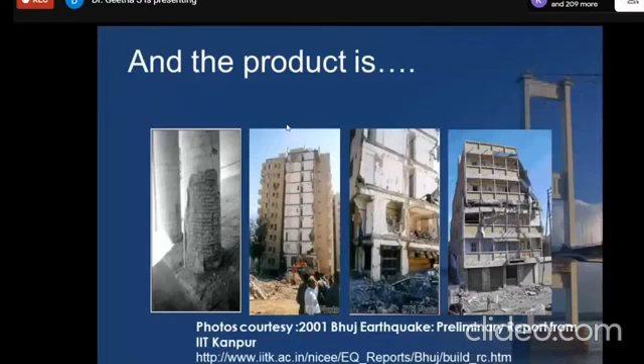customizing anything without a mix design, but an engineer's mistake stands like a monument. I think you can see this wonderful mega structure in history. But again, this is talked about only because of the mistake of an engineer. I think you know the story behind this monument, right?

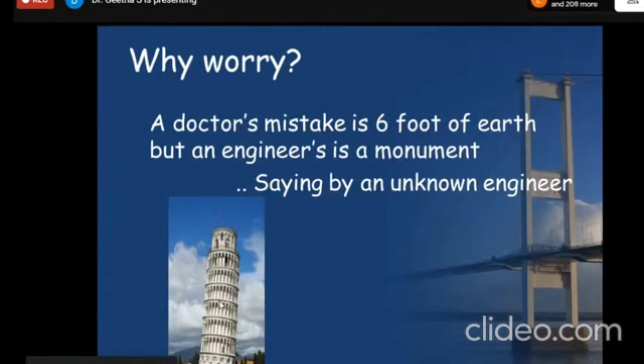Even if not, you have a lot of Google sites wherein you can see the foundation and geotechnical considerations were not taken into account, and there is a lot of story on how they started renovating, how it turned towards the opposite side and all those things. So this stands as a monument to the mistake of a civil engineer even today on earth.

Okay, next. What is the advantage of making a good concrete, or what if I don't make a good concrete? Why do I need a good concrete? We have already seen in the first slide, the ingredients are going to be the same: coarse aggregate, fine aggregate, cement, and then water, right? So with the same ingredients, how am I going to make a good concrete, and what is the deal in making a good concrete?

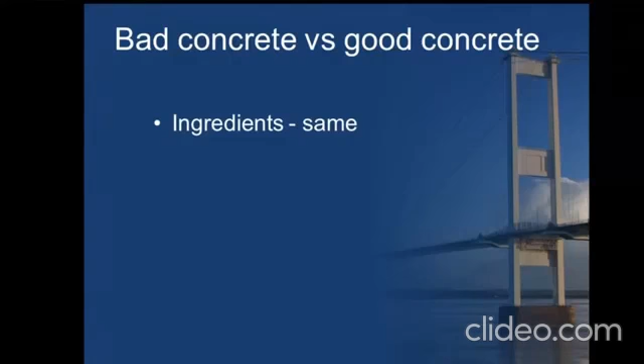Actually, whatever is used in a bad concrete, the same ingredients are used in good concrete, but with quality control, right? For example, we take large considerations in design, fabrication, handling, finishing, curing, and repairing, but we have very little consideration on the ingredients. So, as I mentioned, though the ingredients are the same, the mix design, the selection of the materials, generally nowadays we don't test the basic material properties to do the mix design. We simply go by the rule: when I say M20 concrete, the standard concrete mix will go into place.

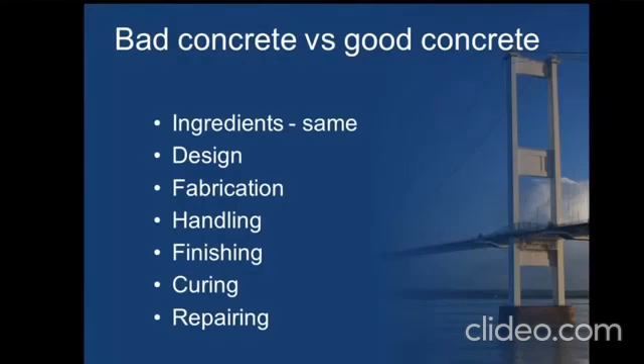Seldom does a civil engineer get a mix design from a laboratory by submitting a sample of the materials, asking them to do all the preliminary tests, making them do a mix design, and then implementing the mix design in the field. So this is the major thing. Though we have the design, fabrication, handling, and other mechanisms the same, it is the ingredients that actually differentiate a bad concrete and a good concrete.

Why do we need a special concrete? Actually, from man's civilization, starting from being a caveman, he slowly started improving his habitations, right? So he started building buildings using lime mortar, then slowly with stone masonry, and then with the invention of cement by Joseph Aspdin, it slowly started emerging.

And before going into the special concretes, I would like to emphasize one simple fact: 95% of the buildings constructed in India are termed non-engineered structures by a survey recently taken by the Indian Concrete Institute, which means that 95% of the structures have been built without any consultation with either a civil engineer or a structural engineer, right?

So it only depends upon people who claim to be civil engineers or claim to have immense practice, saying they have gained more knowledge than civil engineering, who say they have a lot of experience. But still there is some technology that goes into this material aspect, though they have experience in designing buildings using thumb rules, and they claim that it stands for more than 50 years or 20 years.

Still, you need a bit of science and technology that goes into the structure to make your structure stand strong, right? So in this aspect, as we started improving our infrastructure and our economic activities, there came into practice a lot of structures, like we started building bridges, we started building tall buildings due to the constraint in the land. Then we started improving the urban habitats and all those things.

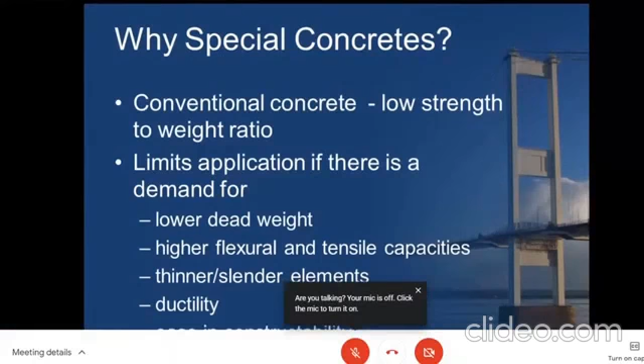When we started going for bridges and tall buildings, the main thing that came into design was our dead load. Only when our dead load is reduced can the foundation be very efficient, right? So in this case, we need to go for high strength concrete, where lots of special concretes like high strength concrete, high performance concrete, self compacting concrete, reactive powder concrete came into emergence, and these are no longer just in research. They have started to be practiced on site, right?

So the next thing is ease in constructability. Previously, as I told you, more water was required for workability. I think we know what workability is, the ease with which we can handle the concrete. Later on came the invention of superplasticizers, and not only superplasticizers, admixtures play a major role in creating these special concretes. You have n number of admixtures, from superplasticizers to set controllers, retarders, accelerators, corrosion inhibitors, and whatnot. These admixtures help a material specialist make a tailor-made concrete, customizing its properties for the intended use, right?

So when I say special concrete, the major role goes to the chemical admixtures and the mineral admixtures. So people started venturing into a lot of mineral admixtures. Of course, we know many waste materials have been incorporated as mineral admixtures, like fly ash, both class C and class F, silica fume, slag, metakaolin, and whatnot.

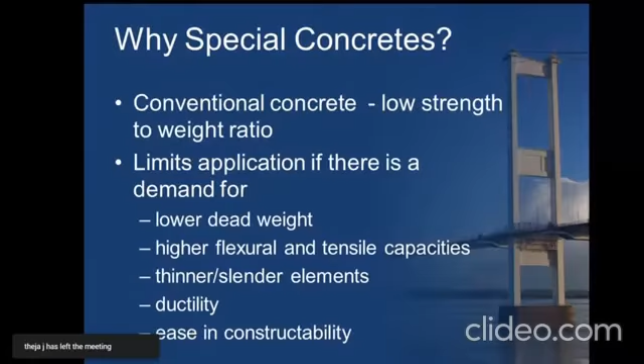Next, water cement ratio is the main aspect in making a special concrete. The main criterion is I need a low water cement ratio. So how do I avoid compromising my workability? Yes, I need good workability here also. So superplasticizers up to the third generation are now in the field. This is the forward thinking by which special concretes came into existence. So these are the reasons why we have started using special concretes.

What are special concretes? I discussed something in the previous slide. We are going to use the same basic ingredients, but not as they are. We are going to use a concept called particle packing. So I would rather use the term tailor-made concrete here; I've made it the first phrase. Though we use the same ingredients, as I told you from the beginning, mixture proportions matter a lot here. The next thing is mixing techniques. Even now, many of us do not know the concept of loading a mixing machine.

Whatever is placed near the machine, we start loading it. There is a criteria in loading the mixing machine, and there is a criteria in mixing also. Your dry mix should be homogenized in a proper fashion. Only then your mixing water should come into place. And there is a time and there is a proper way in which the mixing practices have to be carried out. And there is a time when the superplasticizers have to be added to the concrete and all those things.

And next thing is handling methods. So generally these handling methods come into practice when we have pumping facilities there. So when we have pumped concrete from RMC plants, from ready mix concrete plants, then we look into these handling methods. And otherwise, if not, we usually have a human ladder in moving the concrete to the respective place, which is again a main factor to be considered in transferring the concrete.

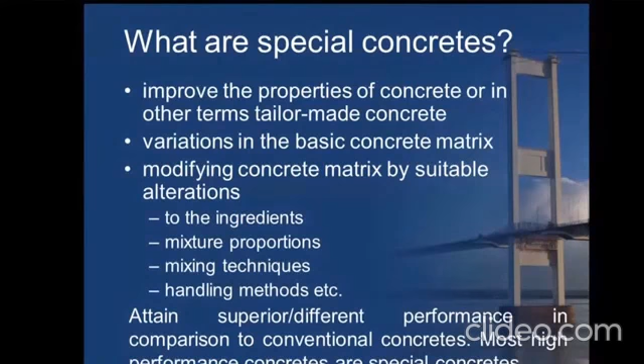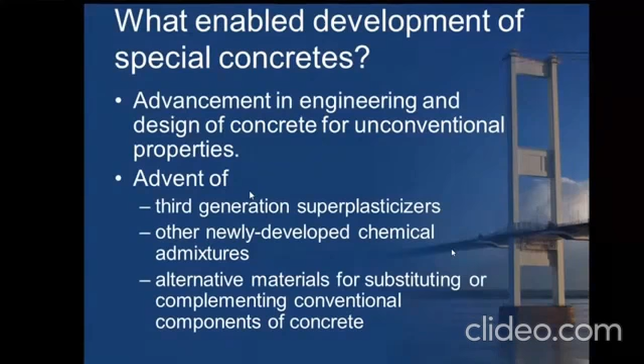structure and the type of structures the architects started designing. I think we should thank the architects for giving a big challenge to the civil engineers, because of their design we should be able to convince them, saying that our concrete also behaves equally or even sometimes superiorly than the conventional concrete that is used in practice. Even then, there is a lot of hesitation in taking this product to a commercial market.

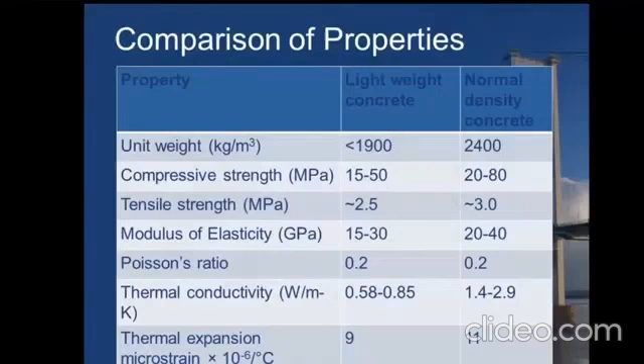And modulus of elasticity, there is not much difference here. Poisson's ratio is the same. You can see the major important aspect is the thermal conductivity, which I showed you, which I've been talking to you about in the previous case. So the isolated air void actually has a good thermal insulation. Here we can actually see the thermal conductivity value of a lightweight concrete and the normal concrete. And finally, the thermal expansion values. So these are some of the comparisons of the properties with respect to normal density concrete.

And some common applications. So in marine structures, we have gone for those infill blocks only. I would say most bridge decks in foreign countries where there are ice deposits or snow deposits, they prefer to use lightweight concrete there. And the main thing is generally floor slabs are also used. I'm not talking about the common practice in India. In India, still lightweight concrete is only restricted to building blocks that we see as Aerocon blocks.

And the technique has not been well versed, or it has not been established for us to carry out in practice. I would not say it is still in research. I would say that there is some reluctance in taking this lightweight concrete application to the market. But these are some of the applications that have been used abroad.

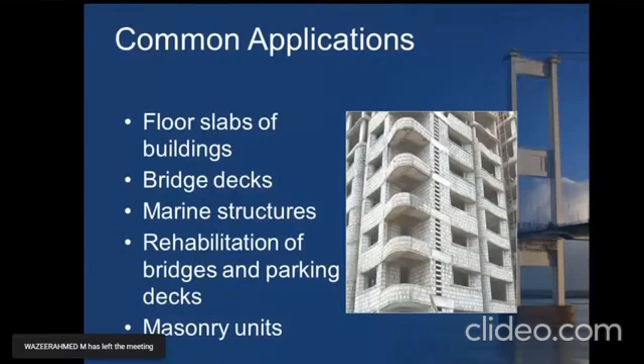Right. Next thing, self-compacting concrete, which is a very fascinating type of concrete, where we had proven that concrete can run like water. So whenever there is a problem and there is a solution, we invent a new material. So that is a very clear thing. So the same way the self-compacting concrete was invented only because there was a problem encountered in Japan.

So in Japan, when there was a big industrial level revolution, when they started constructing large constructions, the detailing showed very congested reinforcement prevailing there. So they found it very difficult to use an ordinary concrete where they required a lot of energy in vibrating the concrete to make it a honeycomb-free structure.

So it was there where a material scientist, Okamura, invented the self-compacting concrete. He's actually called the father of self-compacting concrete. Even now, the mix design that is followed in self-compacting concrete is from the paper that he had actually published. So he has given a very detailed description about this self-compacting concrete.

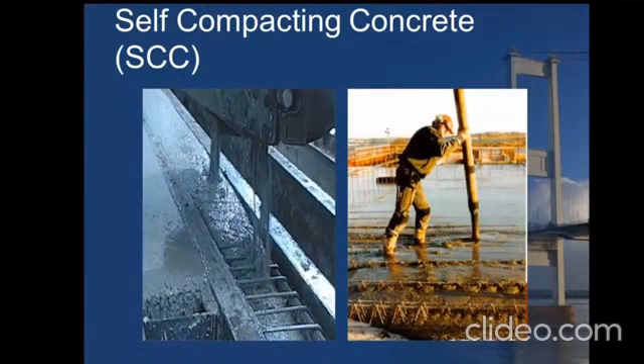And generally the main application, I would put it this way: whenever we have very congested reinforcement, we could go for self-compacting concrete, and that is the only solution for us to avoid vibration while making the concrete fill the entire space. So this is a customized concrete for congested reinforcements.

In strength, you would be able to achieve greater than 50 MPa, and you can even go up to 80 MPa. So it comes under the category of high strength and high performance concrete. And as I told you, the advantages, the density and all those things are the same.

And here you should make a note that the size of the coarse aggregate has to be limited, because, as I told you, it is mainly used in situations where you have congested reinforcement. So generally we prefer to use 12 mm down aggregates. A down size of 12 mm is preferably used in self-compacting concrete.

And here I would appreciate the use of chemical admixtures, which play a major role: VMA, viscosity modifying agents, superplasticizers, and also mineral admixtures like silica fume and fly ash. We call something paste volume here. So paste volume and aggregate volume are the two aspects which should be considered while designing self-compacting concrete.

And one more thing that is required is a very technical expert member to place this, because not all can handle self-compacting concrete. You should be able to control the speed. At one particular point, you cannot accumulate the entire concrete because it will be flowing, gushing out like water. So you need skilled workmanship to place self-compacting concrete, right? So these are some of the takeaways to be considered when self-compacting concrete is in practice.

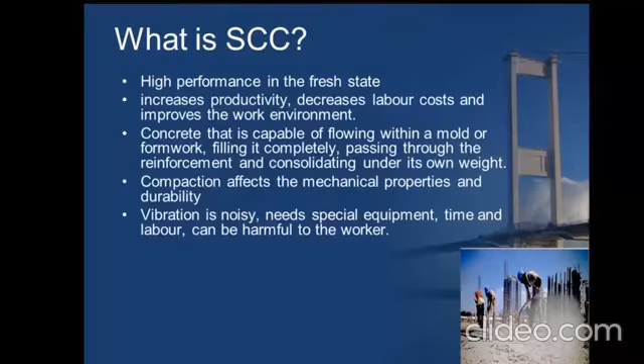So what are the features of self-compacting concrete? Mainly when we do this in a laboratory, we have a lot of tests only to check the flowability, passing ability, and filling ability. So we don't constrain the word to workability alone. We have many types of tests like the L-box test, the V-funnel test, the J-ring test, and a lot of tests are used mainly for workability.

The strength properties of SCC are very similar. You only need to cast a cube, a cylinder, and a prism to test the compressive, flexural, and split tensile strength of concrete. But in terms of workability, we have a lot of tests as per the Euro standards to ascertain whether it is able to pass through the reinforcement without any delay. We take the time traveled by the self-compacting concrete in passing through all these molds.

And the next main thing with self-compacting concrete that we have come across in practice is segregation. When we are not able to get a good blend of self-compacting concrete, there is a major problem termed segregation, where the aggregate separates from the mortar, and that is a big problem. The sole purpose of using self-compacting concrete, as I told, is that I don't need a vibrator. But when segregation occurs, it is a very tedious job to make it work in practice.

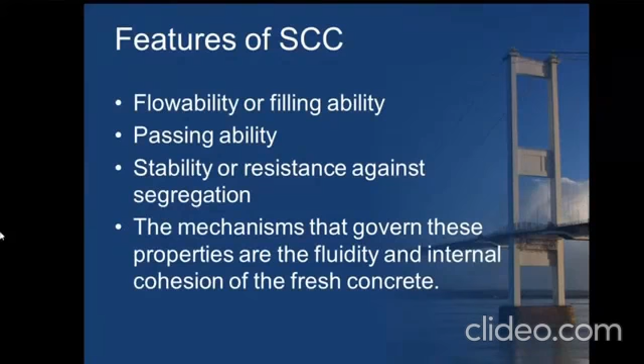So we'll see some quick tips to make a very good self-compacting concrete. Use superplasticizers, and I was talking about something called paste volume. This paste volume should be greater than 35%. I'm talking about the entire matrix. The entire volume of the concrete has to be considered; it is differentiated into a paste volume and an aggregate volume.

For this paste volume, we have a lot of tests for paste, like the Marsh cone test and mini slump test. All these are done to first tailor-make the paste combination. These are all very miniature equipment in the lab to customize your paste volume. The paste volume plays a major role in self-compacting concrete, so we need a high paste volume. This can be achieved by using mineral admixtures like silica fume and fly ash.

So if you see the customization mix proportion of self-compacting concrete, it is actually very different. The paste volume is a very major factor here, and we have a very low aggregate volume here, only 0.3 to 0.35. And next one, as I told you, we need a viscosity modifying agent, VMA, in order to look after the flowability of the concrete.

And main thing is, though we use a lot of fines, we should be able to enable the flowability of the concrete so that there is no blockage whenever we are doing those tests like passability test or fillability test or whatsoever it may be. And again, here I would like to say the water cement ratio. I think here we have given low water.

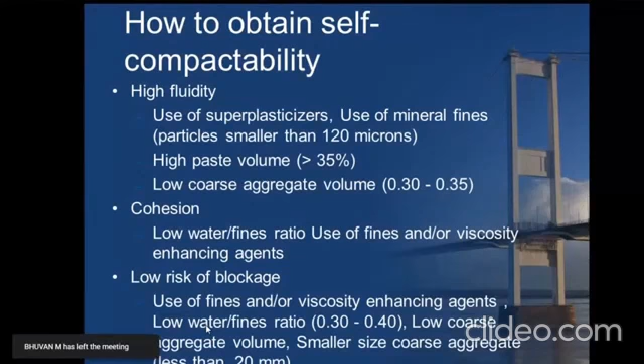So what are the applications? We have a lot of applications. Actually, now I could say self-compacting concrete has emerged as a normal concrete, and in many places people who are demanding RMC concrete are asking them to bring self-compacting concrete. I had seen a lot of self-compacting concrete in our metro rail projects also, and also some high-rise buildings use self-compacting concrete.

So these are some of the applications of SCC: bridges, tunnel linings, columns of high-rise buildings, many sandwich structures, composite structures. Self-compacting concrete is the best concrete that can be used. And nowadays for repair and rehabilitation, instead of guniting and shotcreting, they prefer to have self-compacting concrete with a chicken mesh, I should say.

And when we are going for diaphragm walls, or a mat foundation, or to construct a two-story basement below ground level, self-compacting concrete is generally preferred. And for girders and culverts also. So it has become a common concrete. In a very short time, it has found applications as a normal concrete in many buildings in India and abroad.

Abroad, normal concrete has been totally replaced by self-compacting concrete, I would say. Generally in Japan, normal concrete is very rare to see. Self-compacting concrete has totally taken over the concrete industry in many foreign countries.

So I have a video here. I don't know if you would be able to view it. You would see the pouring of the self-compacting concrete. See if you're able to view it on the screen. Are you able to see it? No, ma'am. Okay, I'll show it at the end of the session. Maybe I should share it separately, right?

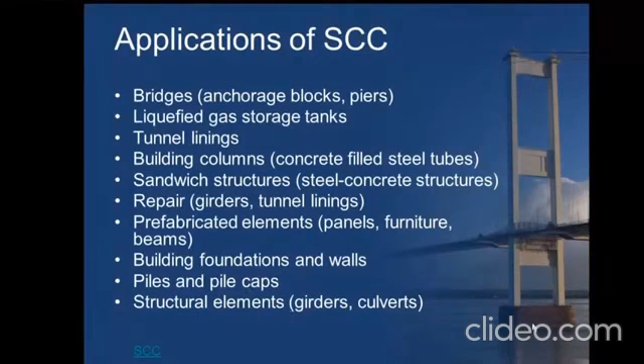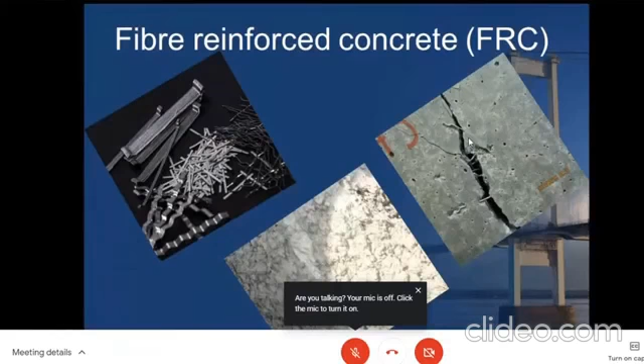So next will be fiber reinforced concrete. The major advantage of fiber reinforced concrete is it actually bridges the crack. You could see the images. The first image gives the various types of fibers that are used. This is the fiber incorporated in the fresh concrete state, where you can see the distribution of the fibers. And this is hardened concrete after the strength test, where you can see the fibers bridging the gaps of the concrete.

I've given some of the properties of fiber reinforced concrete here. Nowadays pavement slabs have been constructed using fiber reinforced concrete in many places. There are a lot of fibers, starting from steel fibers itself. You have hooked fibers, straight fibers, chopped fibers, carbon fibers, Kevlar fibers, glass fibers, polypropylene fibers, polyethylene fibers, and whatnot. Many fibers are now used in practice.

Generally, we also have a mix of fibers, which we call a hybrid fiber reinforced composite, wherein we have a combination of steel fiber and also polypropylene or polyethylene fibers. The main thing to see in fiber concrete is that it actually improves the flexural resistance of concrete. So when you want to increase the ductility of high strength concrete, fiber should be incorporated in order to overcome that disadvantage.

As I told you, after diagnosing the advantages and disadvantages, the material scientist should be able to appropriately rectify the disadvantage by using the correct material. So when ductility is a major problem in high strength concrete, it can be converted into a fiber reinforced high strength concrete, where steel fibers can be added in the matrix and the ductility of the structure can be improved.

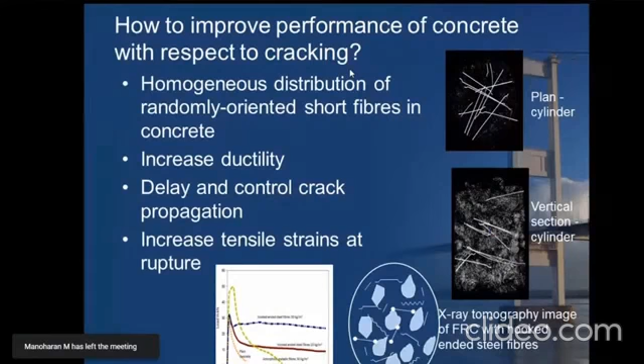These are some of the properties with respect to fiber reinforced concrete. I've given you test results and tomography image analysis that can be used to find out the dispersion of fibers in hardened concrete. In a fresh concrete state, we may see where the fibers are dispersed, but after mixing, placing, or vibrating the concrete, we won't get an idea of how the fibers are actually dispersed. This is one of the non-destructive testing methods - we generally use X-ray tomography to get an image analysis where we can locate the fiber dispersion in the matrix.

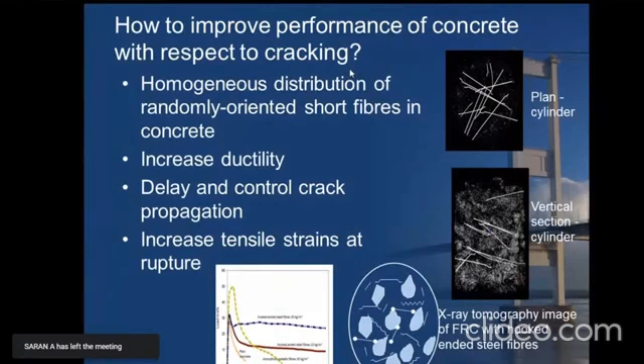These are some images to enhance the properties of fiber reinforced concrete, and as I told you, these are some of the fibers I had listed out. One thing to add here is nowadays we have started even using organic fibers from plants. Many fibers like hemp concrete are used to make sustainable concrete. Why do we need to go for steel fiber, why do we need to put polyethylene fibers into concrete? These plant fibers perform equally well, like steel fibers or polyethylene fibers.

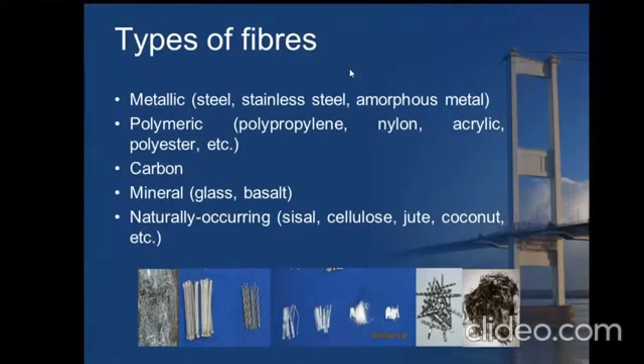Apart from these types of fibers, we also have, as I've given at the end, naturally occurring fibers like cellulose, coconut fibers, jute fibers, and hemp fibers which are also used in concrete nowadays. I don't know whether they have been used in practice - I think they are still in the research stage only. But steel fiber reinforced concrete with steel fibers and polyethylene fiber - mainly polyethylene fibers - are used in slabs, bridge deck slabs, in order to prevent shrinkage cracks. That is one major important aspect where shrinkage cracks are prevalent in slabs, and these polyethylene fibers can prevent shrinkage cracks to a large extent. Each fiber has its own unique properties which can be used appropriately wherever required.

Characteristics of fiber reinforced concrete: generally it improves the flexural toughness of the material, and it has been very successfully used in bridges, and nowadays many concrete road pavements have started using this fiber reinforced concrete, with basalt fibers. They have started using these basalt fibers because when we use steel fibers, as the concrete erodes, the steel fibers pop out, damaging the tires.

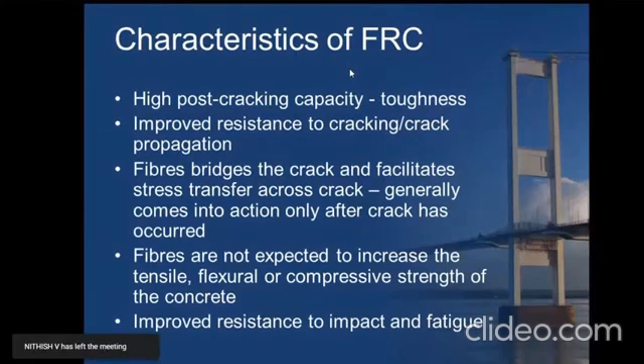So they have started using basalt fibers. One major advantage of these fiber reinforced concretes is that they take up impact load to a large extent, and the fatigue performance is also good. Fatigue is repeated loading - not like cyclic loading where you add and remove load at proper intervals, load and unload. Fatigue is continuous loading of the member. In that case, fiber reinforced concrete performs well in all cases.

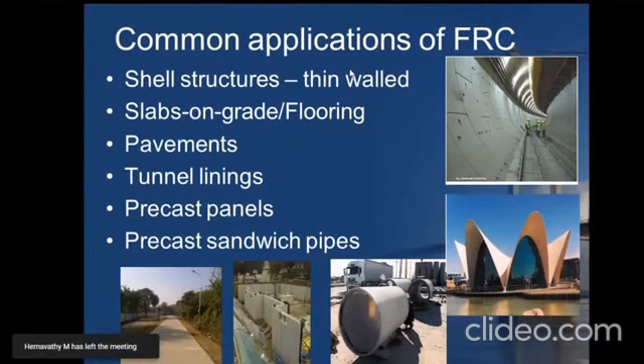So these are some of the common applications of fiber reinforced concrete: slabs on grade, which is generally what we call flooring and pavements, and precast panels - many precast industries have now switched to fiber reinforced concrete. Sandwich pipes also have larger applications in fiber reinforced concrete.

So the next type of special concrete - I think we now know this concrete a lot more. Everywhere you go for a student project, out of 10 projects, 5 will be on geopolymer concrete. This is a zero cement concrete, but the sad thing is we still haven't put it into practice because we claim it is costly - the alkaline activators, sodium hydroxide and sodium silicate. Many activators have come into practice now, but we claim this is a sustainable construction material with no carbon dioxide release into the atmosphere. It makes a green environment and all those things.

So I would like to give a briefing about this geopolymer concrete. As we know, it is a zero cement concrete. We require a silica rich base - I will not say only fly ash is used. We also use metakaolin, kaolinite, slag, and all these have been proven to be very efficient raw materials in making geopolymer concrete, not only fly ash. So I can no longer call it fly ash geopolymer concrete. There are a lot of silicate rich materials that can be used as raw materials, and you can achieve enormous strength in geopolymer concrete.

The major factor governing the strength is the molarity of sodium hydroxide and the sodium silicate to sodium hydroxide ratio. This is still in research with a lot of durability practice, but many countries have adopted it, mainly Australia, where bridge tunnelings and bridge structures have been constructed using geopolymer concrete. They have perfected the activator solution there - you can simply order a bag of material containing the binding material along with fine and coarse aggregate, and the alkaline activator supplied in cans or barrels. Take it to the site, mix it, and now you don't even need temperature curing for making geopolymer concrete - you can make it at normal ambient curing temperature.

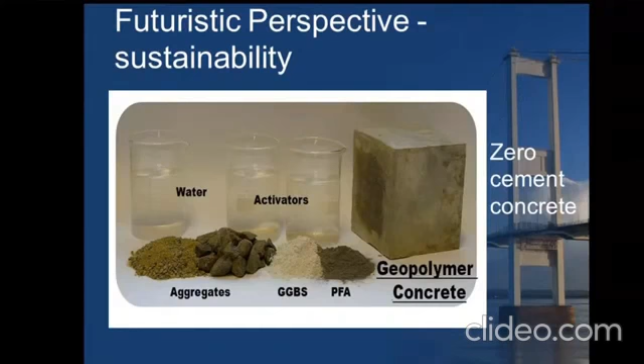Concrete in 3D printing is actually deposited in layers using a pen-like structure connected to a pump. We deposit at least 10 to 15 layers in a day. The main thing is you need to customize a mortar to avoid settlement. As I keep laying the concrete, each layer should be completely set before laying the next layer on top of it. This is one major aspect that has to be considered in 3D printing concrete.

So the main thing is mortar. Here, coarse aggregate is totally eliminated, and fine aggregate, a very fine powder, has to be used.

One thing I missed in lightweight aggregate concrete was about aerated or foam concrete. I mentioned fly ash or fine sand can be used, and the same applies to aerated concrete. You cannot use fine aggregate greater than 300 microns in aerated concrete. Either you need to pulverize the sand or use a very fine particle size distribution of fine sand in aerated concrete. That is one important aspect.

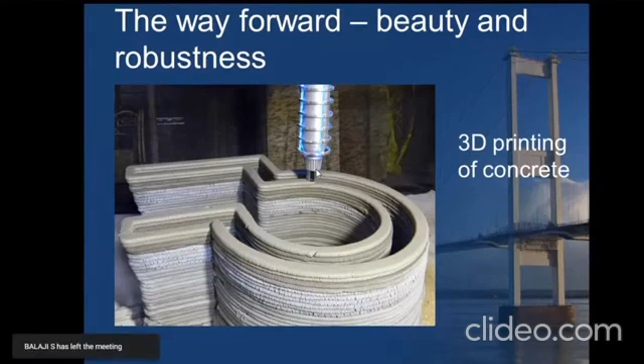You can only make a constant pattern with this 3D printing, so you need to customize the mold when you go for 3D printing. That is one major disadvantage. But if you browse YouTube now, a lot of buildings have been 3D printed. So they are customizing it slowly, and we'll soon be able to even make a building using a 3D printed concrete technique.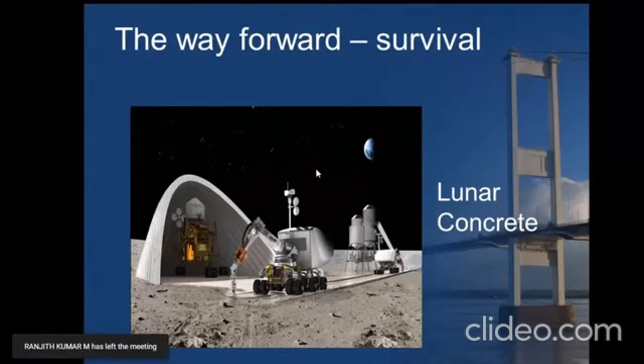So the next thing, just to have an ice breaker between these lectures, is lunar concrete. We've seen news where people have mimicked lunar concrete. People brought samples from the moon, and now there are notices that soon we'll be making shuttle spaceships where you can go like a tourist to the moon and to Mars, stay there and come back. In that case, they need to build habitats there. They brought some material from there, which was actually calcium rich material, and mimicked it, terming it lunar concrete. This is just a note on what is happening in the material aspect, not the specific material combinations that go into lunar concrete.

The next thing is also a very interesting concrete, reactive powder concrete. It has been used in cooling towers and high-rise buildings. This is notable because again, total coarse aggregate is eliminated, but the strength achieved is from 200 to 800 MPa. 800 and 600 MPa concretes are already in practice abroad. This reactive powder concrete has a lot of customization involved.

I'll give you some tips to make reactive powder concrete. One thing is a low water cement ratio, and a different type of Portland cement has to be used - a very fine kind, where the fineness needs to be very low. Large quantities of silica fume will also be used. Ordinary sand cannot be used here; instead fine quartz sand, or in certain cases steel powder, is used as the fine aggregate in reactive powder concrete.

Generally, reactive powder concrete cannot be made as a normal cured concrete. You need temperature curing to achieve this strength. Not only steam curing, but sometimes pressure is also required. So generally we go for an autoclave process where temperature and pressure enable the hydration reactions to take place faster. These are some of the major points to be noted in the manufacturing of reactive powder concrete.

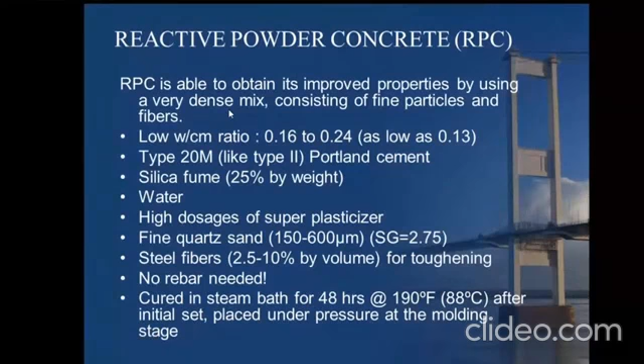I'll just show you some other results with respect to this. So, properties. We have achieved, as I told you, 200 to 800, and in India we have achieved around 100 MPa of this reactive powder concrete. Tensile strength is actually enormous, 20 to 50 MPa. And generally, wherever we are going to use this reactive powder concrete, we don't go for steel reinforcement.

Rather, we embed fibers inside the matrix of the reactive powder concrete, and the thickness of the sections that we are building using reactive powder concrete is very thin. I would give you an example. A bridge girder was designed with an M60 concrete, which resulted in 1.5 meter depth of the girder. When it was replaced with reactive powder concrete, it was only 30 centimeters. So just imagine the reduction in size of the sectional member when reactive powder concrete comes into place.

Next is flexural strength. Flexural strength is also enormous. Young's modulus is great, 50 to 75 GPa. And fracture energies: generally, it requires a lot of energy to fracture reactive powder concrete. You need very high capacity testing machines to test this reactive powder. Your ordinary compression testing machine will not create a failure for these reactive powder concrete specimens. You need to go for very high-end testing machines in order to customize the strength and finalize the mix design of this reactive powder concrete.

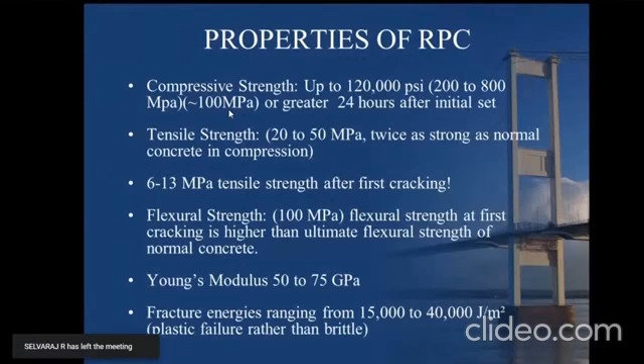And here again, you will be seeing the tests that are to be conducted, again marsh cone and mini slump, in order to bring out this reactive powder concrete. Continuing with reactive powder concrete, it is phenomenally great in durability, and it has no shrinkage or creep because coarse aggregates are not incorporated inside this concrete. So there is no shrinkage or creep.

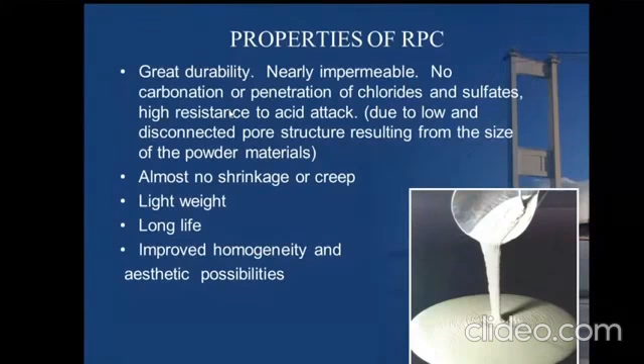And since coarse aggregates are totally eliminated, the density of the concrete is also less when compared to conventional concrete. It will be around 1900 maximum. And I can term it as lightweight. Why? Because it comes under the slab of 1900 as per ASTM. So I can claim this as a lightweight concrete also. And one more thing, I don't have a problem with segregation and all those aspects because my coarse aggregate has been totally eliminated from this type of concrete.

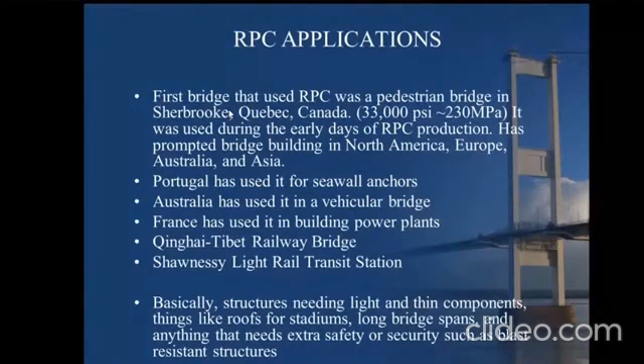And what are the applications? I've given some very interesting structures that have been built using reactive powder concrete. Mainly, structures abroad have been built with reactive powder concrete, and it has been found to be very advantageous in building long span bridge structures and stadiums also. These reactive powder concretes can play a major role when reduction in sectional properties is a concern.

Right. So the next thing is nano concrete. Nano concrete has become a very common way of treating, but it has still not come into practice. Nano concrete has been tried in shielding of radiation in some industries. We have single-walled nanotubes and multi-walled nanotubes, and apart from this, when nano materials are used in concrete, we call it nano concrete. When we pulverize mineral admixtures to nano size materials, we even term those as nano concrete. Generally, nano concrete was initially termed when carbon nanotubes were incorporated into concrete.

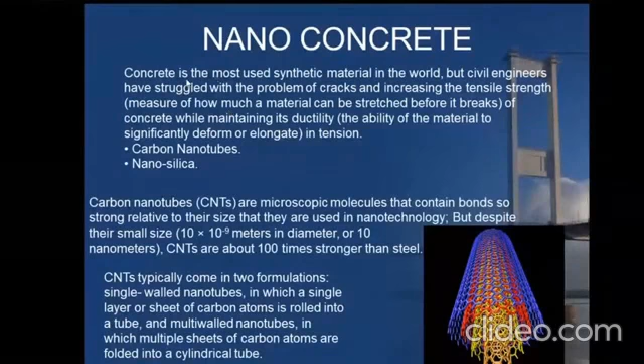The only major disadvantage in nano concrete is dispersion of these nanotubes, and now I think this can be overcome using a sonicator. You can disperse the nanotubes effectively using a sonicator, and the strength of the nano concrete is again enormous. When you require a high strength concrete with lower cross sectional dimensions, this type of nano concrete can be used.

Next is again a fantastic concrete called self-healing concrete, which is still in research. They say self-healing concrete is a bacterial concrete. Not always. Not only bacteria play a major role in self-healing. It can be made in two types. Self-healing can be done by bacteria, and also you have some epoxies. I could also reveal the name.

It is sodium silicate. Sodium silicate, otherwise called water glass, is put in capsules. These capsules are tailor-made. The sodium silicate is filled inside the capsules and dispersed across the entire matrix. So when a crack propagates, the stress on the capsule breaks it, releasing the sodium silicate outside, which bridges the crack.

So this is a very simple basic phenomenon in self-healing concrete. The major disadvantage is your capsule should be designed in such a way that it breaks correctly when the intended stress is applied. Otherwise, there is no point in making a capsule and incorporating it in the mortar, right? So that is a major point to be noted here.

And next thing, as we know, bacteria. Bacillus is the strain here, and it is a very easily available bacteria, which you can see in the mud. Sand strains have this Bacillus strain. You can just extract the bacteria. You can use an agar-agar solution. You can cultivate the bacteria, increase its number, and then incorporate it in the concrete. It becomes dormant. Actually, this type of concrete was again discovered accidentally.

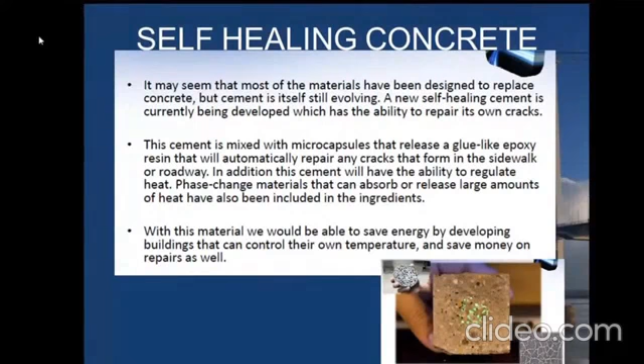we extract the bacteria, we increase its number, we incorporate it into the mortar, and when there is a crack, the conducive environment for the bacteria actually occurs. It gets water, it gets sunlight, it gets oxygen and all those things. And finally, it secretes calcite, which actually bridges the crack. So this is actually called self-healing concrete. Not only bacteria, but epoxies and sodium silicates can also be used in self-healing concrete techniques.

So the next one is an interesting concrete, translucent concrete. Even before its research, it has been incorporated in commercial things. We have optical fibers incorporated in concrete. 95% will be the concrete matrix. Coarse aggregate will not be here, only mortar will be here. And we have 5% of optical fibers. Optical fibers generally transmit light.

Translucent concrete panels have been predominantly used in the walkways of many high-rise apartments in OMR. Initially we thought it was sensors, but actually these are translucent concretes; I'll show you certain images wherein it has been used. Even at nighttime, you can see some lights glowing. Not only for pavement, it has also been used as side walls. I think one stadium has been built using this translucent concrete. So it's not a big deal. The only thing is you need to find the appropriate glass fiber optical strands, which will conduct the light. It is commercially available.

So as I told you, even before research proved it, there are many components that are commercially accepted and have started being used. So now I'll be giving you a list of such components. You wouldn't have even studied research papers on these 5 to 6 materials I'm showing now. You have seldom 1 or 2 papers. Soon after that, it has been transferred commercially, right? So one such material starts here.

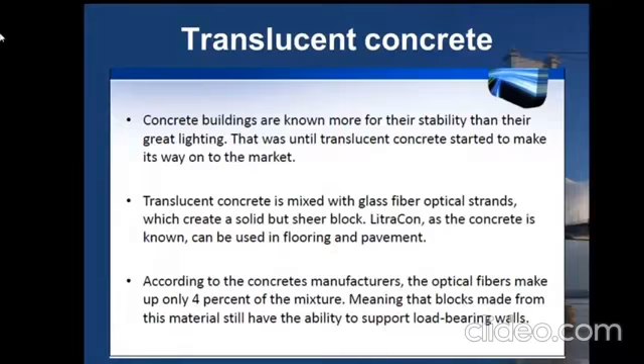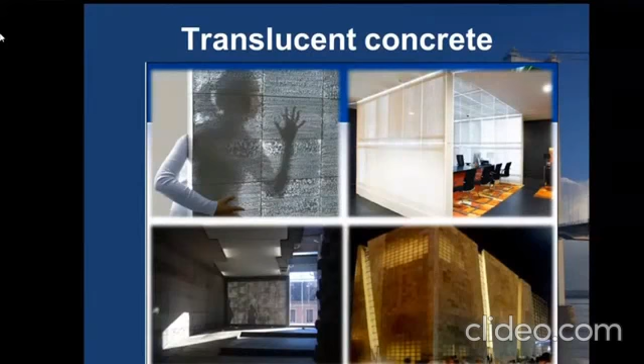It is translucent concrete. Here you can see some examples. You have the glass panels, you have some wall panels, and in many cases even your ventilators are made using this translucent concrete. Mainly daylight. You can make your building, your house very bright when you're using this translucent concrete. So this is one of the major hikes in all our special concretes.

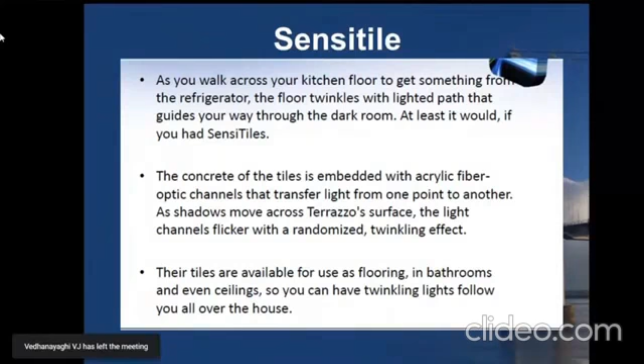Next thing is something called Sensitile. As I told you, this is the same concept of translucent concrete, which has been used in floorings, generally in many apartments, which will again improve the lighting effect in your house. I would like to show you the images here. These are some of the walkways that are used in apartments.

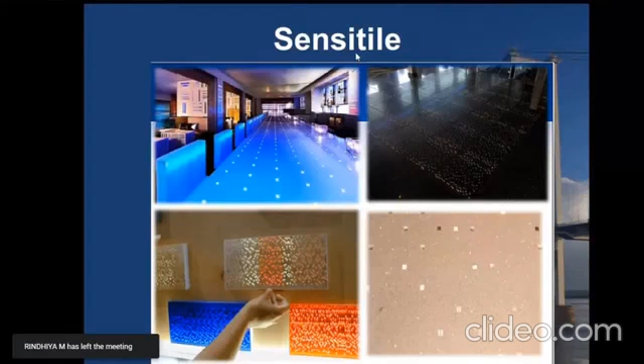Initially you will think that it is sensors, but it is not. You can see the dispersed light in all the images. You cannot have sensors so closely spaced like this. It's commercially available, and it is termed Sensitile. These are actually our concrete mortar where these optical fibers have been incorporated in order to make it attractive like this, right? So the next thing is electrified wood.

So here we need to connect it to a very minimum light. So you can use it as a table, or you can use it as a shelf, as a wardrobe or something like that. So here we have a wood and a metal piece embedded inside the wood. We actually make it by a press technique here. I think you can see the details here, but you need an electrical socket to connect.

Obviously, it doesn't have any light emitting diodes or anything like this. You need a minimum power supply where some light panels will be actually embedded here. And mainly you can use it in your study room, or it can be used in a shelf or in any particular applications. It is called electrified wood. Actually, it is incorporated wood.

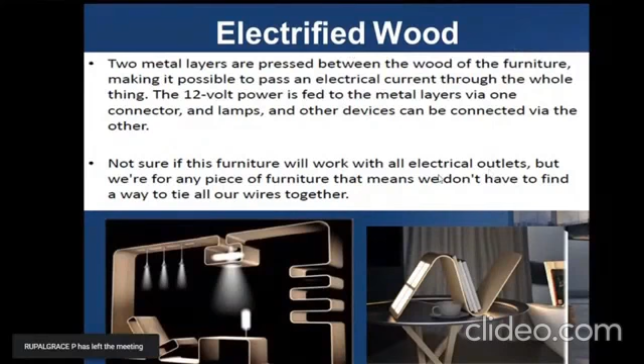So far we had seen the light emitting capacity in concrete. So this is one thing where concrete is not involved, wherein we have metal strips and wood, which can be used mainly in some applications like study table, as I told you, and some furniture which can be used in our house. And the next important, interesting thing is this Richlite.

There were only 1 or 2 papers on this Richlite. It was not termed as Richlite. This is a commercial name, and it is actually a sink top. Imagine it is just paper. This top is a paper. Actually, you can see the composition. 70% of this material is recycled paper, and you have a lot of resins that go into this. It looks similar to your granite top, stronger than that.

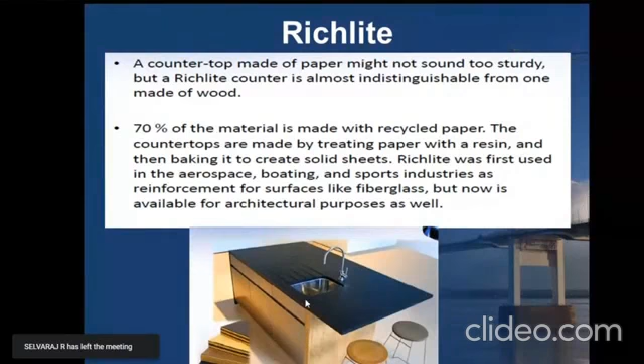Very light in weight, and this is one of the products that has been in the market recently. And you can see the combinations here. I've given here only the tabletop. I'm not talking about the wood that is in the bottom. This tabletop is actually this Richlite material made with recycled paper and the resins. Next one is liquefied granite.

So liquefied granite is like a paint actually. You can make it on a floor. When I need a 150 millimeter thick concrete in an industrial flooring, and that too gets damaged when I drop down a hammer or something like that, this material was actually found out, liquefied granite. I'll just show you the image at the next slide. We'll just look quickly into the advantages of using this liquid granite that is made like a paint.

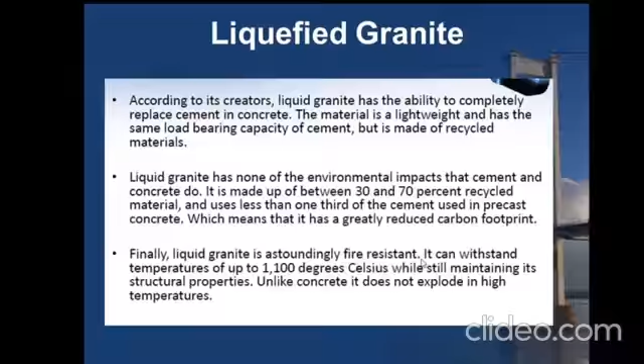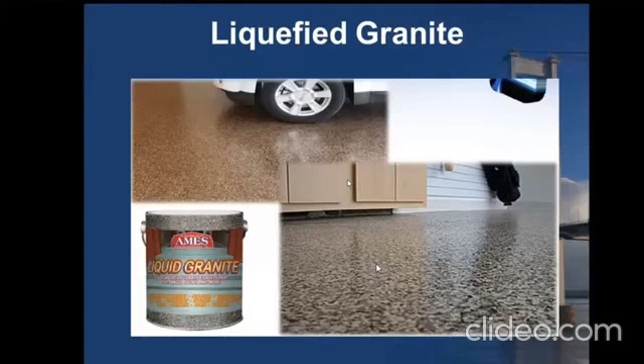We know granite. Granite is a very strong material. So this liquid granite, which can be just applied as a thin coat, will serve the entire intended purpose. Here you can see the commercial name is also given, and this is liquid granite flooring that has been done in a garage and a car showroom. So these are some of the advantages of using liquid granite, wherein I can avoid very hardcore concreting in a ground for a flooring, I should say.

Next one, bendable concrete. Again, this is still in research in India, but it has been used in many buildings elsewhere. It comes as a thin section. The main secret behind this bendable concrete is PVA, polyvinyl alcohol fibers, which make the concrete bendable. So you can bend it like a cardboard, but not by using your hand. You need some mechanism, like a compression testing machine or a flexure testing machine. It's not so flexible that you can bend it using your hands.

I'll show you. So the main thing in this bendable concrete is it is very flexible, ductile, and it can be used in earthquake resistant structures. I think now a company is coming up with precast bendable concrete which could be used in zone 5 earthquake zones, mainly in Delhi, Gujarat, and parts of the Himalayas and Jammu Kashmir. This precast construction company is pioneering bendable concrete for beams, slabs, and wall panels.

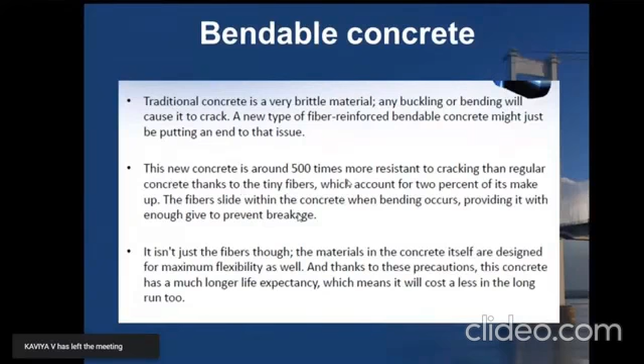And the secret ingredient, as I told you, is polyvinyl alcohol, and the dosage of fibers has to be customized depending upon the flexural resistance we need. So here you can see a bendable concrete. I said you cannot bend it by hand, obviously. So you need a loading setup like this in order to bend it.

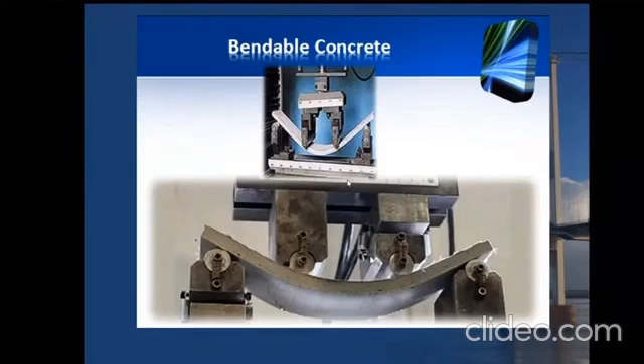So you can see the curvature of the bending in this particular type of concrete. So the next thing is concrete canvas. So here we have a very flexible material. You can see here this concrete canvas. It is actually a very light material. You have a fabric, cloth fabric or something like that, where concrete will be incorporated into this.

Main thing is it sets very fast, so you need to place it very soon. And one more thing, the strength gaining is also more. You can load the structure in 24 hours. Mainly it has been used for people making temporary accommodations, just like tents where you have some temporary arrangements. You stay there for a short time and then you just leave it. Some barren hill stations or something like that.

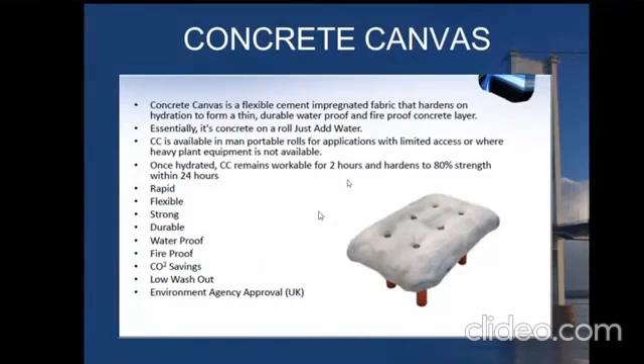So this concrete canvas will soon replace all our shamiana materials, maybe down the line. So this is one of the materials, and it has been approved by many agencies to be used. For example, when we have a larger time duration of something happening, maybe a stall or an exhibition which is happening for a month or a week's time, then this type of material is recommended for us to make the particular structure in order to place whatever things we need in that.

So next one is e-glass. I think we know this e-glass mainly. It's not like our ordinary glass that we use in car windows. So this e-glass actually traps the light when it is in winter season. It actually makes the room feel a little warmer, and in summer season it actually prevents the sun's rays from getting in. So it prevents making it more hotter.

So it has a different technique. This e-glass can be actually made on all our outer wall glazes in order to make it environmental friendly. I should say comfort. It is rather used in comfort. So Saint-Gobain has played a major role, and you may ask what is the role of a civil engineer in doing this. For your information, Saint-Gobain now hires civil engineers for their glass facades.

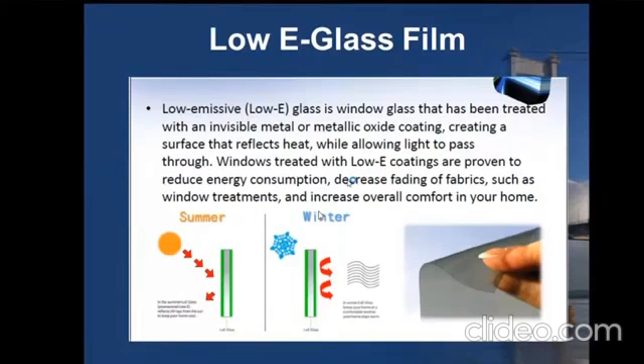So you also need to know, I think many universities have incorporated design of glass structures in their curriculum. All your IT corridors, everything will soon be replaced by these alum boards, will be replaced by these glass panels. So this is one thing which is an emerging technology using e-glass. So this is the principle behind how an e-glass actually behaves.

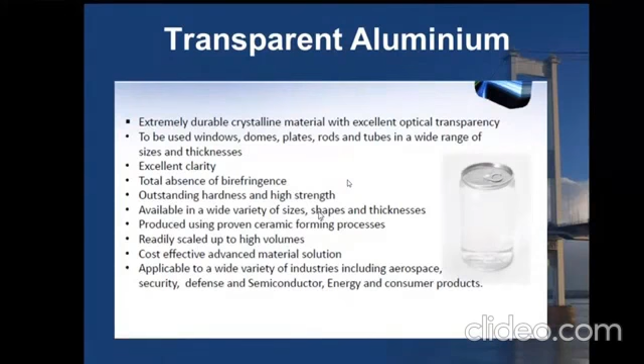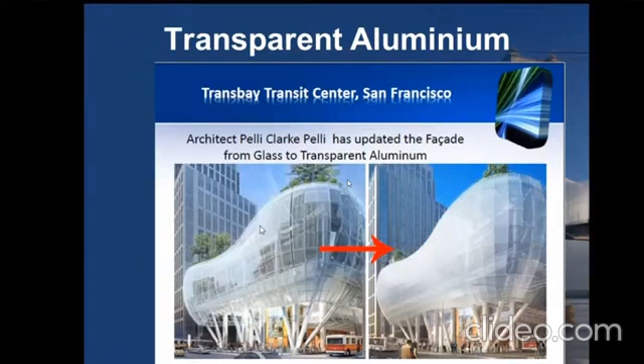So paper insulation. When we need to make a house very comfortable and sustainable, we are using some waste paper here. So again, it is a type of foam concrete wherein you can make the wall insulated. I'll also show you the layers, how they are doing it. Very cheap material, and it can be used with waste cardboards and paper, just grinding it into a paste and having a very low foaming agent in order to bond it.

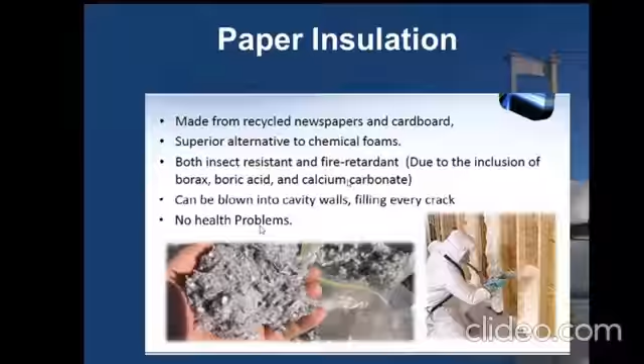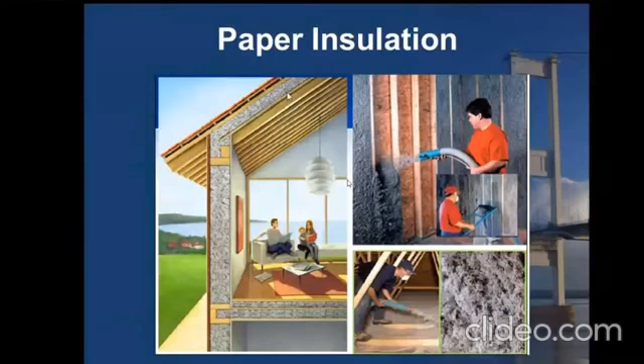I'll just show you the cross section of how this is done. Actually, the homes built of this paper insulation seem to be very cool. You don't even need an AC when you're having walls made of this material, right? So this is the cross section where you have used paper insulation. At the top you can see you have a rafter ceiling with the brick tiles here, right? So this is one of the techniques that can make a sustainable construction.

So the main advantages of using this, actually due to time constraint I removed, we have made a cost analysis. Obviously it is more, but the time frame of construction of this building: when I'm going to use a smart frame structure, 220 days of construction can be reduced to 80 days of construction with these precast smart frames.

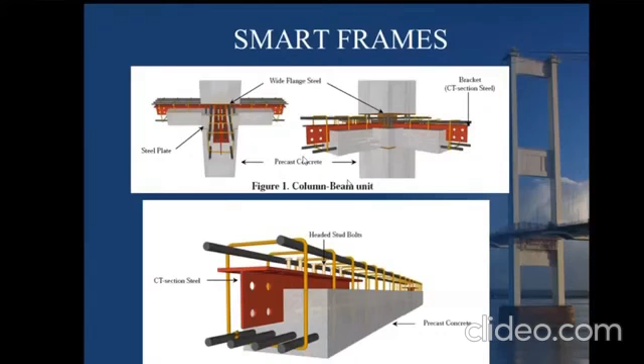So next one is tilt-up construction. Tilt-up construction generally we use for walls. So when we are doing a precast wall panel, we bring it to the site and we just lay it on the ground, and by using cranes, we just tilt it. So one main advantage of this tilt-up construction is you don't need a bulkier wall, because when you make a wall more bulky, transportation and fixing of this construction will be a very tedious job.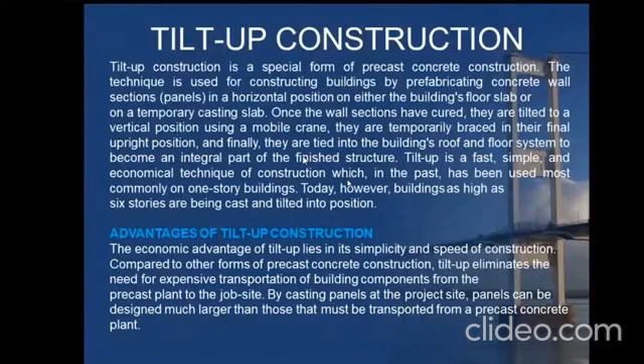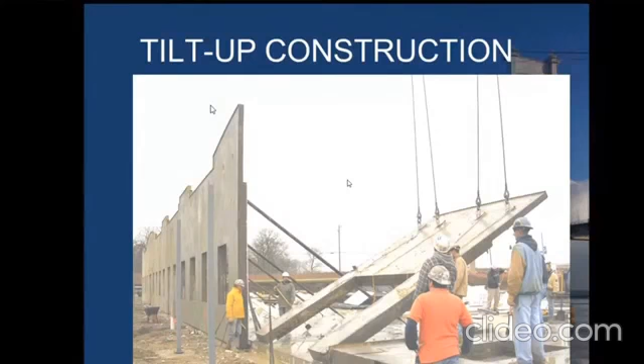So this was actually a godown where the entire walls were constructed using tilt-up construction. It was fabricated on the site and it was constructed and completed within a week. So these are some of the major advantages. There are a lot more constructions, like slip form techniques and many more. I've just given a couple of techniques that can be used. So the major concentration of this particular lecture was in materials, I should say, right?